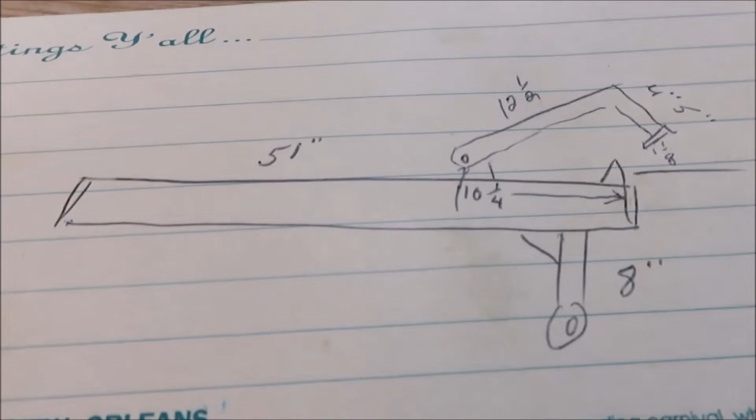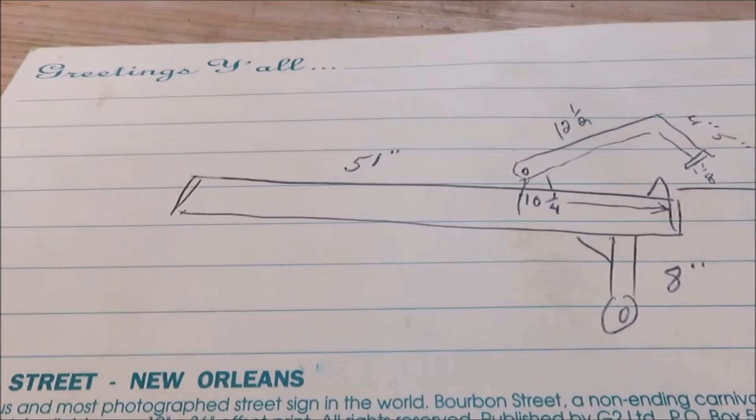Okay, this is just kind of a rough drawing. I did this right on the back of the truck so I can get an idea of how this thing's supposed to look and some of the measurements on it. Now, getting it to work, we'll see, we'll try it out and see how it works. But that's what we're going to build. And like I said, I got as many measurements as I could, so we'll see how it goes along here.

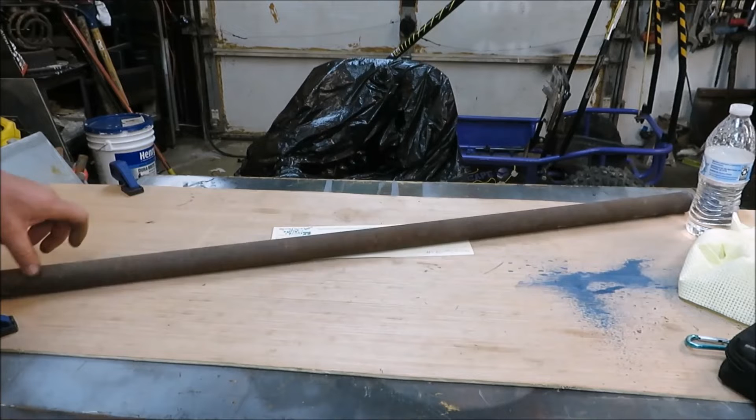Now, the first thing I'm going to start out with is just a piece of pipe. Let me see if I can get a measurement on that. Now, that is not the same type of material his was made out of. His was made out of some cheap metal, and his was actually bent in the middle. So I'm going to build mine out of a very heavy steel. It looks to be about 1.5 inches around, so this is going to be a pretty good piece of stock to pull on, and hopefully it won't bend.

So let's get this thing cut down. We're going to cut it 51 inches. Okay, we got our pipe cut.

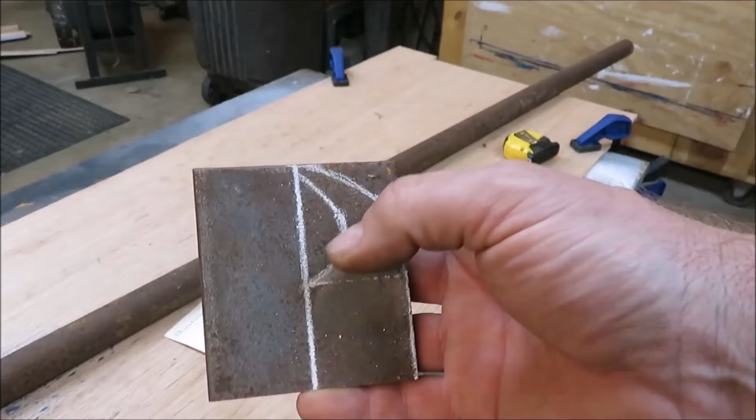Now we're going to be working on the little hook that's going to go on the end there to latch into the log. That's going to be our next step. Here's what I'm going to cut out — this hook that'll latch into the log. This piece here will actually sit inside the pipe and be welded into it. I'm going to get this cut out using a 4-inch grinder, cut it out the best we can, then grind it up and hopefully it'll work.

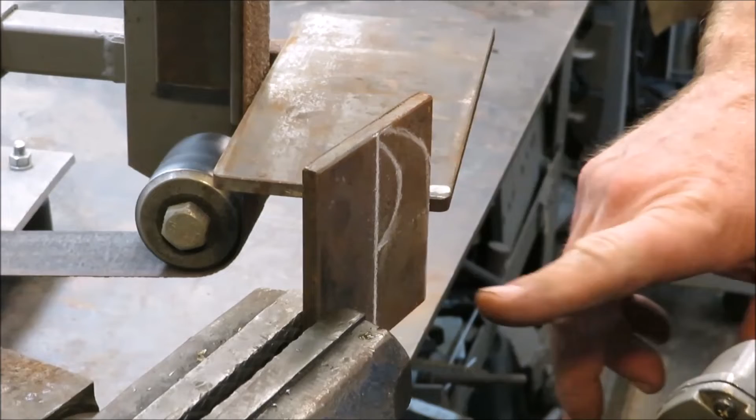On cutting this up, the first step is to cut this metal in half, because we're going to need two of these hooks. This is 1/4 inch thick steel, about 1.5 inches wide each. They're going to be a little bit less than 1.5 inches, but once we get it all ground down I'll get the measurement to make sure — I think it might end up around 3 inches by 1.5 inches, pretty much a 3x3 block of 1/4 inch steel. So I'm just going to go ahead and cut this guy in half.

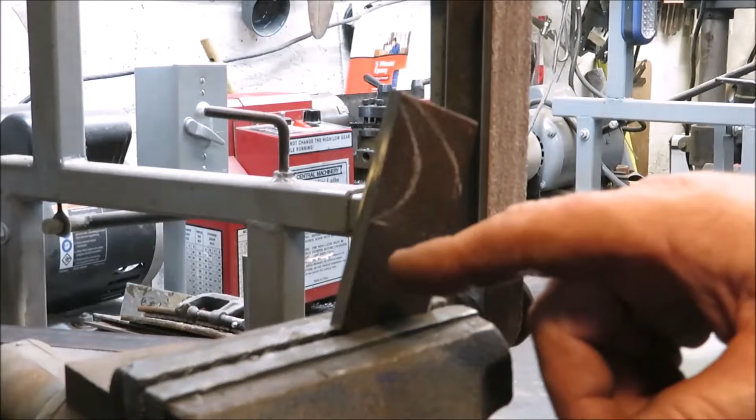Now that we got it cut in half, I'm going to take the 4-inch grinder and start working my way around this piece, trying to make a hook out of it, because it has to be able to hook into a piece of wood like a log.

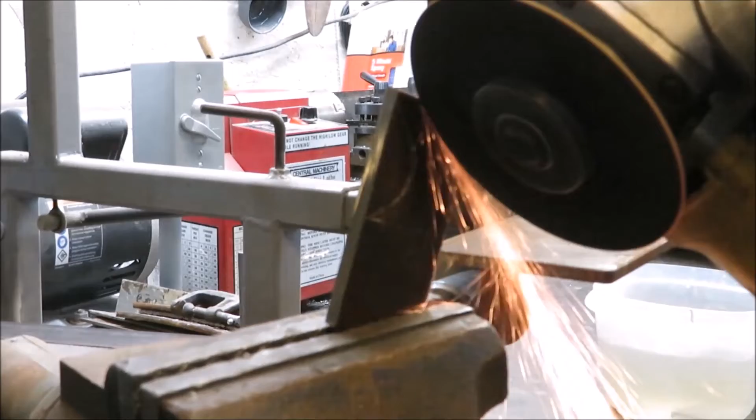Now that it's all roughed out, we're just going to take a regular grinder. We cut what we could, and now we're going to grind it out and make it look like a spike — a nice hook.

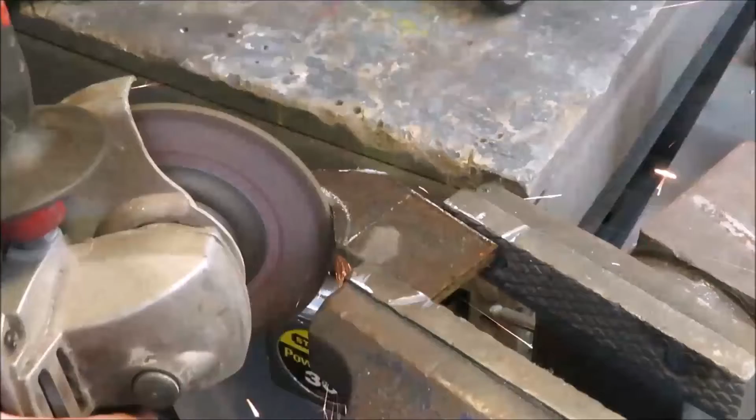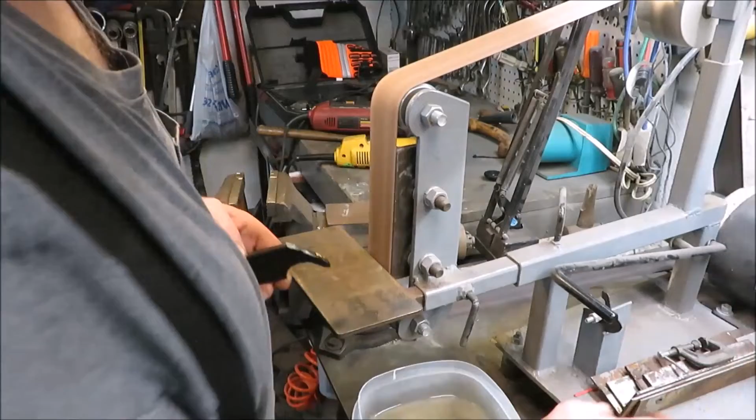Alright, I'm going to take that thing and put it on the sander, see if we can sand it down a little bit and get it nice and cleaned up.

Alright, now we got the hook. This is going to be the bottom hook that mounts in the pipe. I'm not sure whether I got the right hook on it or not. I think his just had a straight point, mine has a little bit more of a hook. Hopefully it'll dig a little deeper into the wood and hold it up on there better. Just hopefully it's not too sharp and it sticks in there. That might be a problem too. So we'll see.

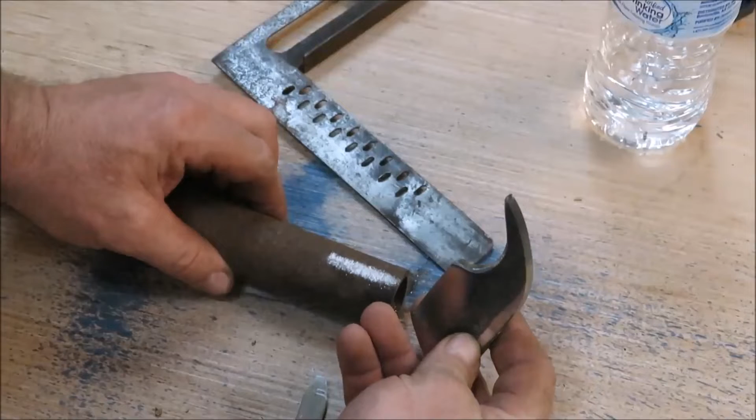Okay, my next step is going to be putting this all the way through this piece of pipe, from one side to the other. So I'm going to cut a slot out of here, put this through there, and weld it inside there. So both sides will be supporting this one hook. All right, let's get this guy cut out now.

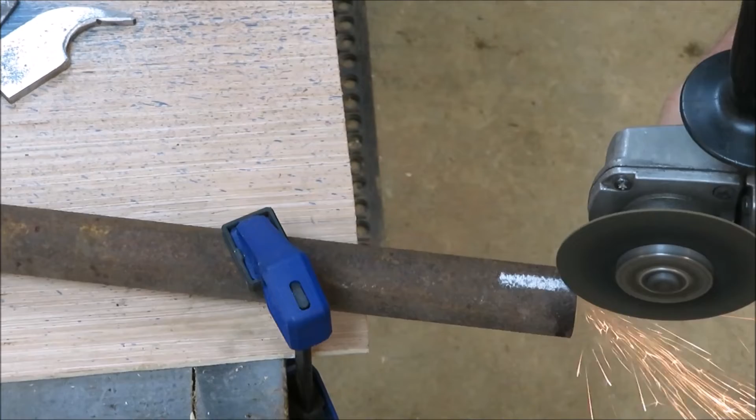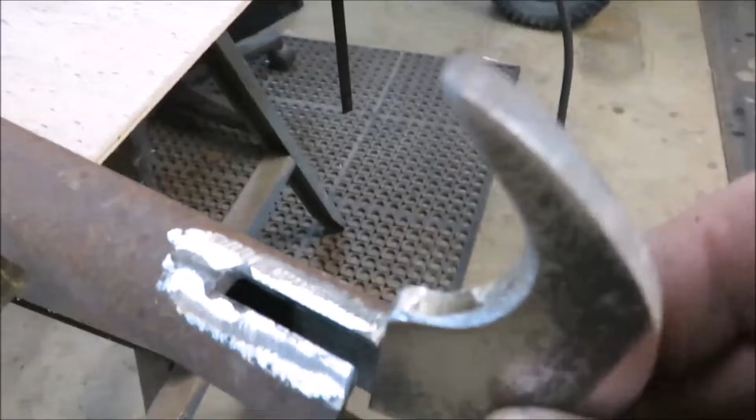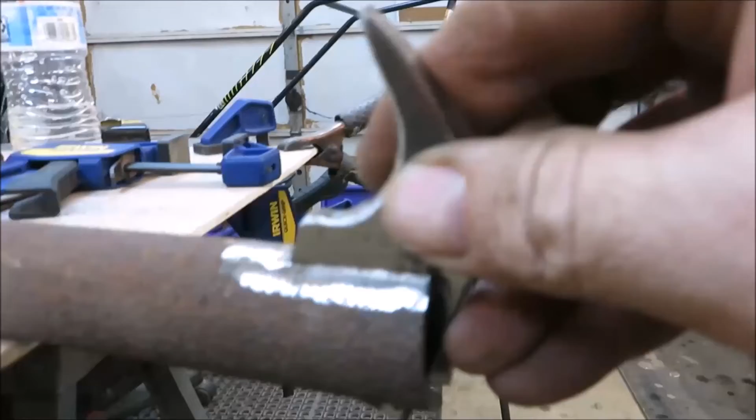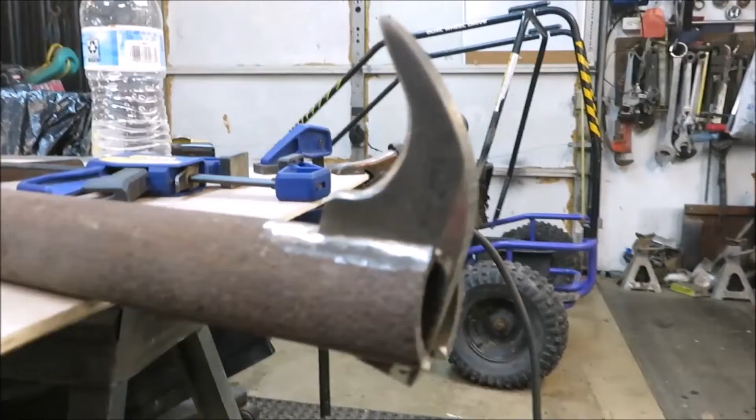Okay, I got that all cut out, both sides, and this thing fits in there really nice. I could actually probably tap it in and get it in there a little tighter. But I think maybe I want this thing bent a little bit more. I think I could have made my hook a little bit straighter. I think that looks better there. So I may just weld it in there like that. It's tilted, but it looks really like a good hook. So I think that might work okay.

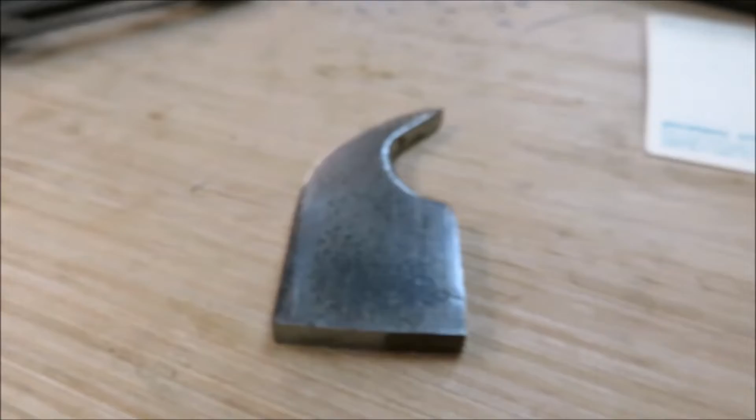So let's take this little piece out, take it over here to the table and show you guys. We're using 1.5 inch pipe, and this guy is about 1.5 inches, so it's just as wide as our pipe. The whole thing overall is about 3.25 inches, and 1.5 inches of that's going to be in the pipe. So you got about 1.75 inches outside the pipe. Should make for a pretty good hook.

Now I just free-handed this on here. I think I could have left some more of this in here. I don't think I had to take all that much out, because this may end up sticking in the wood too tight, I'm not sure. But you should be able to wiggle it out, hopefully it don't bend or anything. We'll get some big old logs and put it in and try it and see how it works.

And you know, I really don't have a blueprint. All I got is some numbers I've written down off of another one, but I'm trying to actually build my own instead of one like theirs. Theirs just had a point on it, cut in just a V, like an arrow type thing, but no hook on it. So I'm hoping that this one's going to work out. So we're going to go ahead and get this one put into the end of the pipe over here.

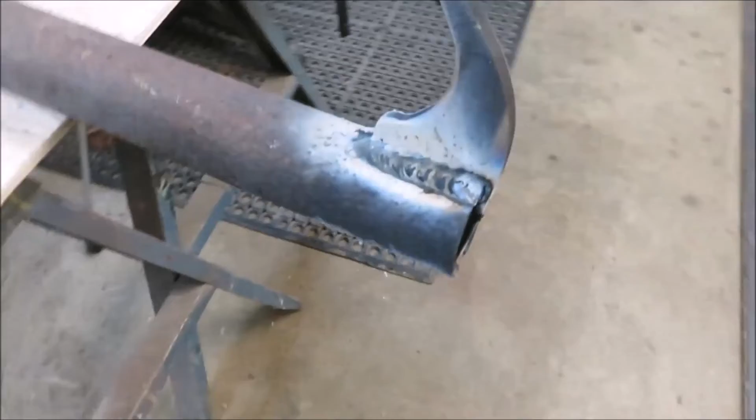Okay, I got it all welded. It's not the greatest, but I think it's going to hold up good. We're going to take the grinder to it, clean it up real good, and I think it'll be fine. I think it's going to look pretty good on there. So we'll go ahead and get it ground up and cleaned up and start on the next part.

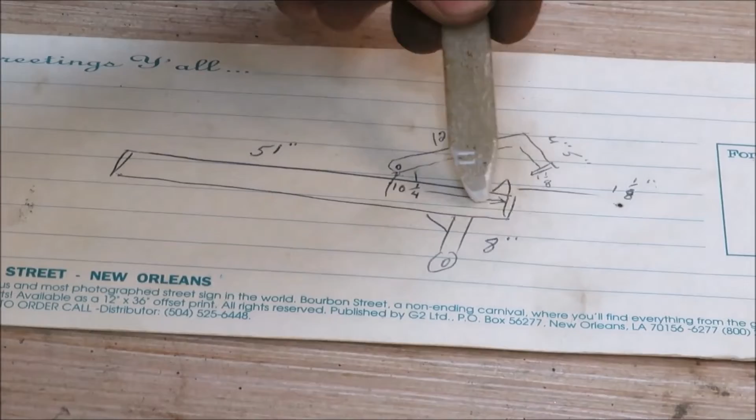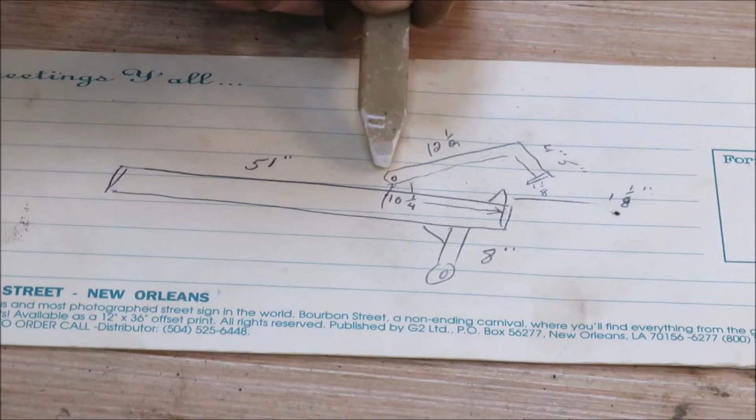All right, so far we got a 51 inch bar, 51 inches. We got it cut, we have our little hook built. Now we got to build a bracket right here, and then this big hook here that goes around the log.

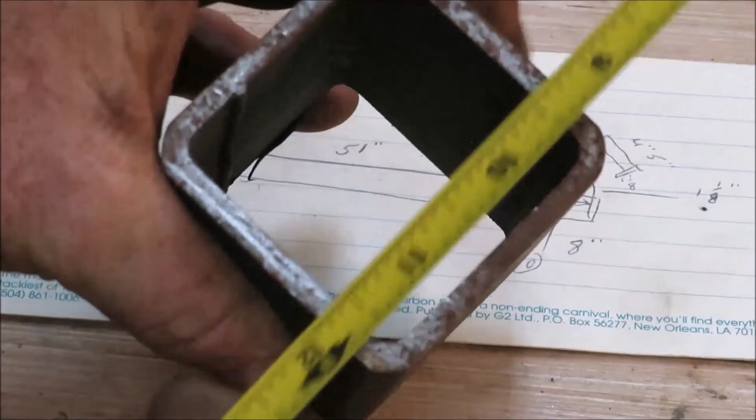So for this bracket that I need to weld to the beam, to the bar, I got an old piece of square stock. I don't have any thickness metal like that, and that's a pretty thick metal. I'm kind of looking for that size, and it's about, I'm going to say 3/16 thick. That's a good heavy steel.

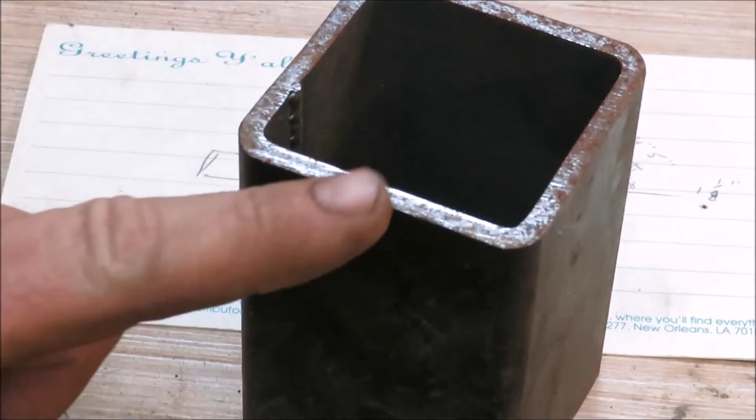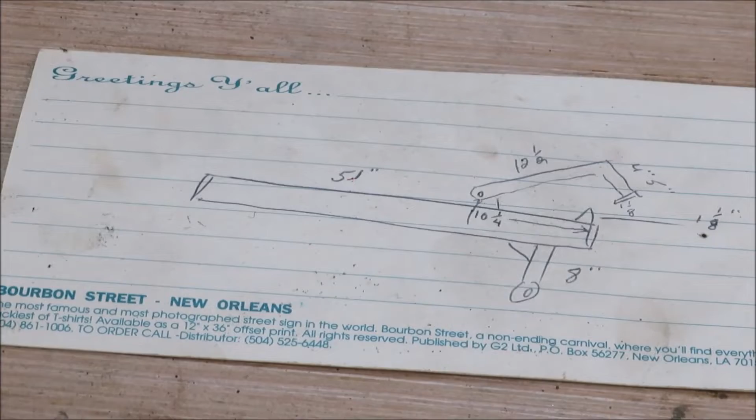So I think what I'm going to do is cut a couple pieces out of the side of this and make these little brackets right here that's going to hold my other arm that will help pick up the log. So let's go ahead and cut some pieces off of this piece here and see what we can do with it, see what kind of design we can come up with. Okay, we're just going to go ahead and cut one side out. I'm almost thinking that one side might work, so we'll go ahead and get it cut out.

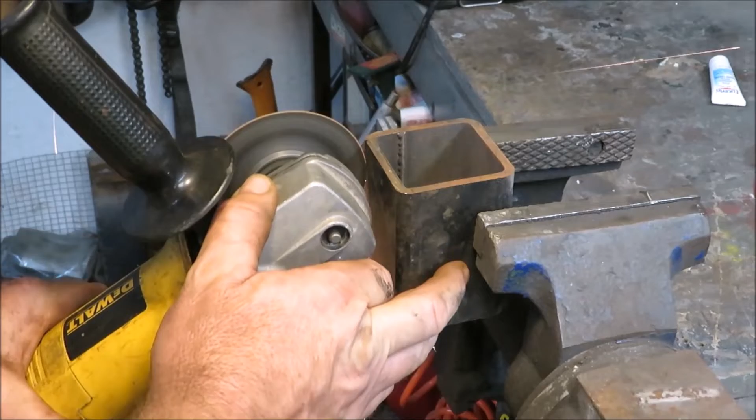Now I'm just going to take the piece that I had cut out of here. I got it in the vise. We're going to cut it in half, so we have two nice little pieces of steel, 3/16 thick.

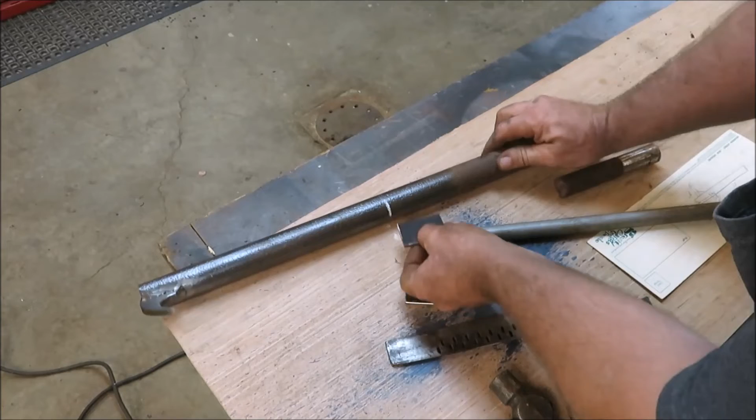All right, now I got 2 plates of steel here. One will go on this side and one will go on the other side. They'll kind of clamp together like this.

If they're not the perfect size, we'll cut them down as we need them. But what we'll do is drill a hole through this. And I'm trying to figure out what I'm going to build the hook out of, this guy right here, the hook.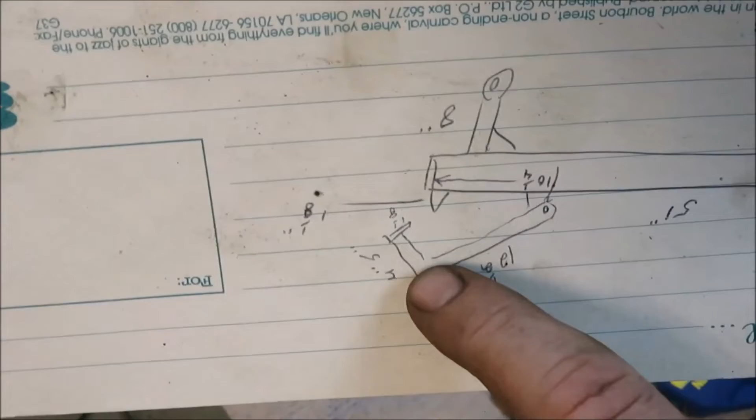I'm not sure what I'm thinking about. I have this piece of 3/4 inch dowel. I was thinking about throwing it in a forge and flattening one end so it could go in between these 2 brackets, and then put the hook on the other end, and then forge the hook out so it would hook into the wood. I haven't figured it out yet, but when I do, I'll get you guys back in here and let you know what I'm going to do.

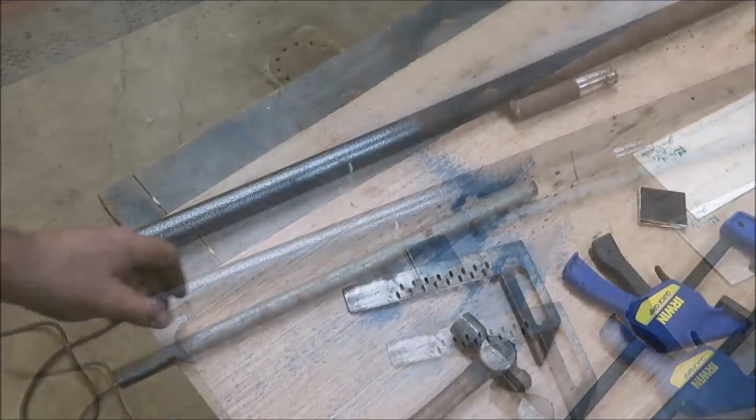Well, I've decided I'm going to forge this out. I think I can forge it out to about 1/4 inch thick, and it probably wouldn't take as long as going around trying to find a piece of square stock. I wanted a piece kind of rectangle, maybe 3/4 inch by 1/4 inch thick.

But I can't find any, I don't have any here, but I got this 3/4 inch stock. I'm just going to try to flatten about 2 to 3 inches of this and get it down to about 1/4 inch thick, and then we'll put our 2 plates on it and get them drilled out. So we're going to go ahead and get this forged out flat.

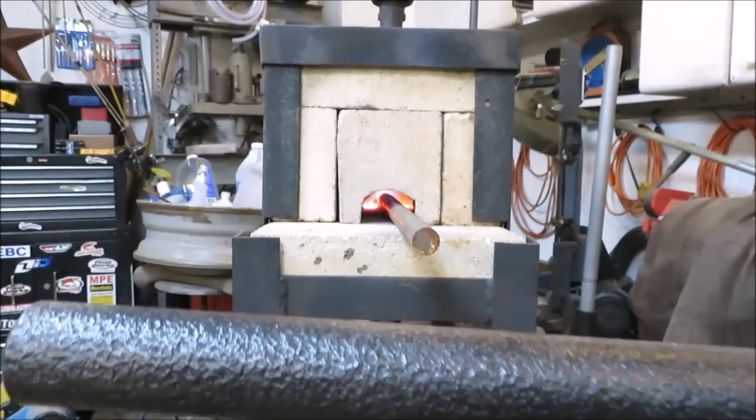Alright, I got it in the forge, got it heating up. We'll be able to flatten that end out and hopefully bend this thing and everything right in the forge to put on the end.

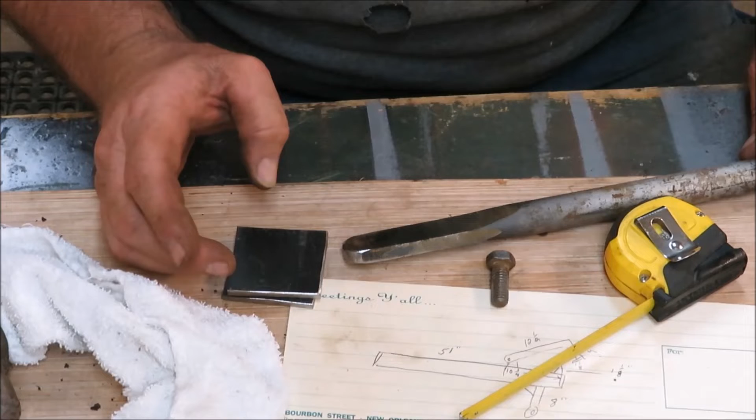Okay, pretty cool, we got to use the forge a little bit. I enjoy working with the forge, but it's been so hot, and it's actually pretty cool today. So we got to do a project with the forge. And not only that, we're going to bend this thing in there and sharpen the other end, so this is going to be one solid piece that'll hook to the log.

And this is how it's going to go together. We got these 2 pieces right here. We're going to clamp these together, and I'm going to use a 3/8 bolt, put a 3/8 bolt through there and snug them up a little bit.

I'm going to try to get a little spacer in between here, because I don't want this really tight, and I don't want it really loose, but I want a little bit of play in there because we don't want this thing seizing up on us. Just a little bit of play is not going to hurt it, I don't think. We'll see as it goes along, but we're going to go ahead and get the 3/8 hole drilled in these plates.

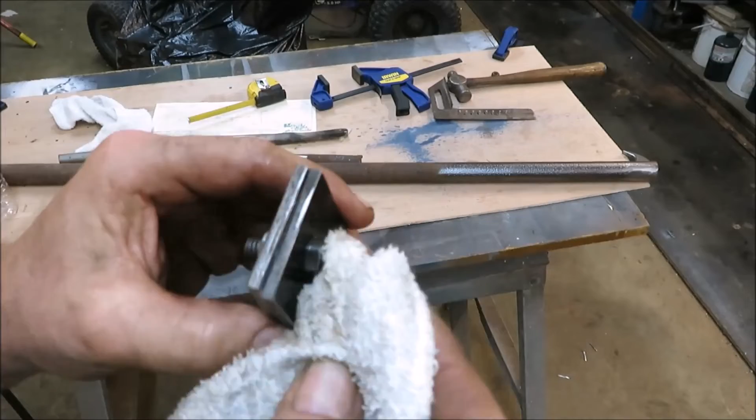Alright, now here's the two pieces we drilled, and I put a 3/8 bolt through there. I took that to the sander, so I got one side that's flush. This will be the side we weld to our pipe, our pry bar.

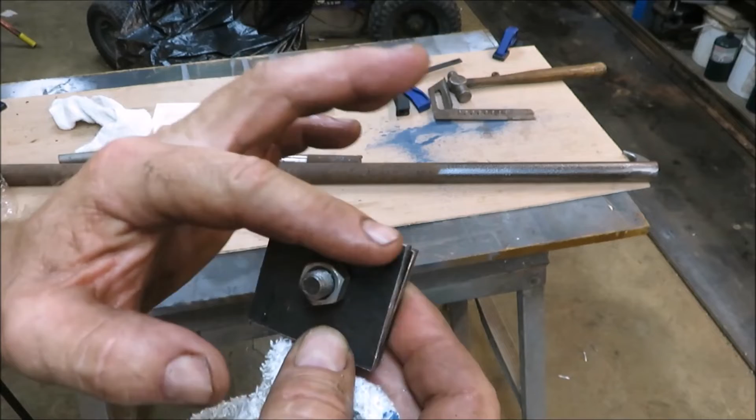Now we can take this over to the vise and put it in the vise and round this edge off a little bit, and round that off and square that up real easy with a grinder. So that's what I'm going to do right now, get this thing squared up and rounded up, make them both look identically the same.

Okay, we got it all grinded down, took it to the sander. It looks pretty nice. So now we'll just take our bolt off. We should have no problem knowing which direction this thing goes because they're both the same.

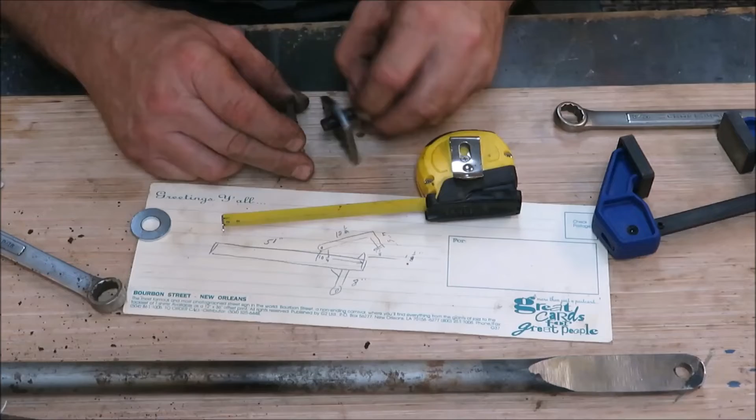Let's get rid of this guy. Now we should be able to put this guy in here. Hopefully this is going to work out.

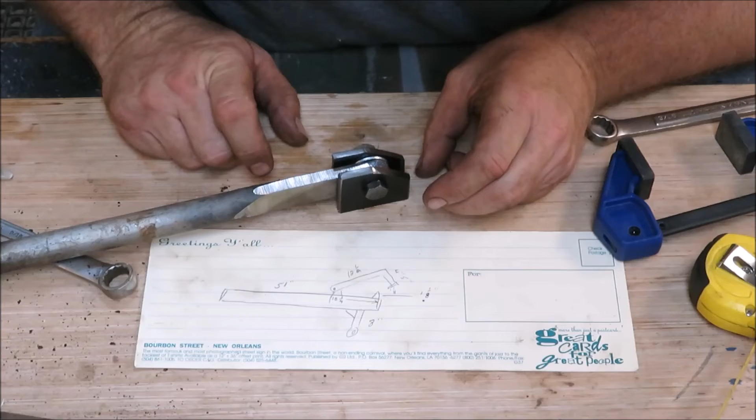Now, I thought about putting a washer in here, maybe, and then putting this one on, and then just tightening this up a little bit. That might be a little too loose, I'm not crazy about it being too loose. Let's see what it looks like if I just don't tighten it too tight, just put it on.

Might be okay if I just don't tighten it real tight, just kind of finger tight. And then we're going to get this now. See, this will be able to swing up and down pretty easily. That's what our goal is. So we're going to get this attached to our pry bar.

So let's get on our pry bar now, looking this thing over. Let's clean up a spot where we want this on the pry bar. We want the bolt about 10 inches up from the tip. So I got it marked 10 inches up on the pry bar, and we're going to go ahead and see if we can clean off a spot to put this guy.

Alright, what I've done here is I kind of lined this up like a gun, looking down the barrel of a gun. I'm trying to get that thing lined up back here so this little tooth would look like it's going through this piece back here. So I'm just kind of lining it up. It's not perfect there, but I think it really looks nice.

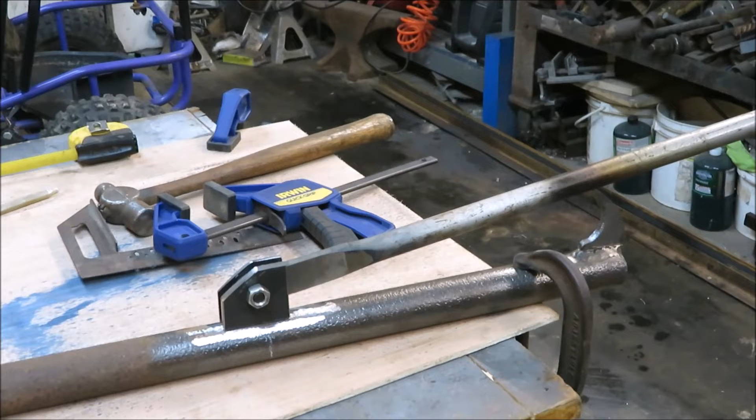Okay, we got it all welded on there. It seems to be working pretty straight. When I put it up this way and put it down here, it's a little bit off of the pipe up there, but it's dead center here. So this is our main part anyhow. So as long as this is straight on, I think we're okay.

So what I'm going to do is probably call it quits for the day, and then tomorrow we'll come out here and measure up so far, and then we'll know where our bend is going to be, and then we'll sharpen this end. We'll put it in the forge and get it sharpened and make a hook out of it. So we can then bend this and match the hook up with that hook, and that way when you put it on a log, it'll clamp on your log there. I guess it might work out pretty cool.

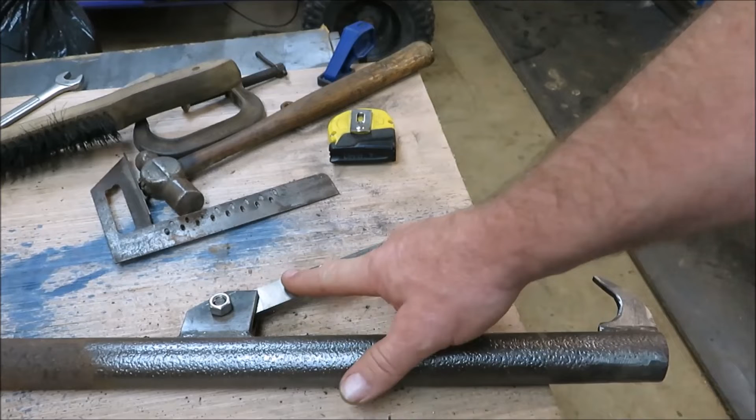Okay, so we have this on here now. We got this done last night. Today we're going to heat this up. Now this is 8 inches from that bolt to there, about 8 inches. Last time we thought it was 12, but it's not. We're going to do about 8 to 8.5 inches.

Somewhere in here, we want to get this thing melted or heated up, and then we're going to bend it down to meet this guy here. So that's what we're going to work on next. We're going to heat this up in the forge, and then we're going to get that guy bent around there.

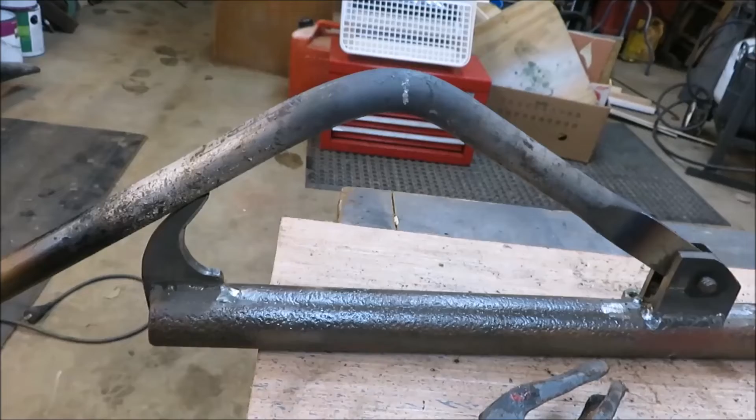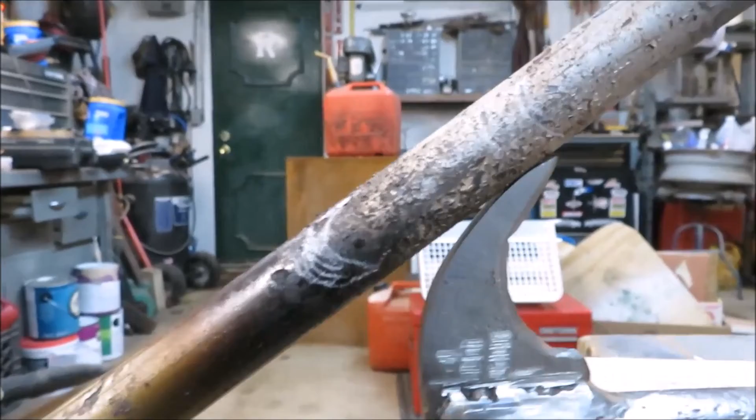We got our bend on there. I don't know exactly what the bend's supposed to be. So now what I want to do is get our tip to end up right by this one here. I think if I take it down in here and cut it off and then bend that around, hopefully we can get this tip to match that tip there. So we're going to cut it off probably right in there, and then we'll try to forge our tip, our hook.

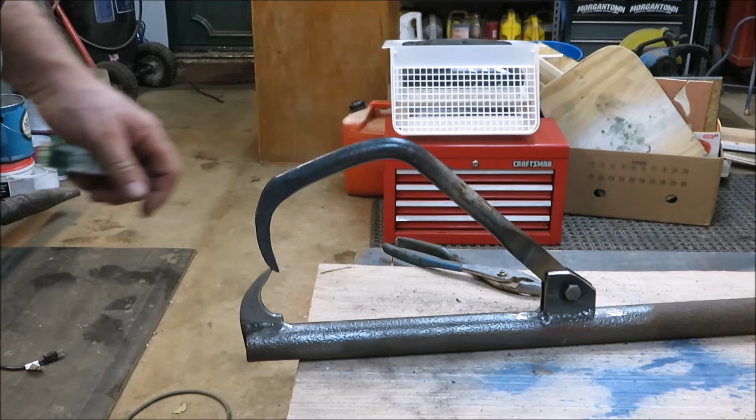Alright, you can see here I'm a little bit off on this, but I'm going to take this over to the grinder and straighten the rest of it up with the grinder. I don't need this to be that long, so I'll probably shorten it down a little bit and give it a nice sharp point that'll go into the log, so we'll be able to clamp on the log. Now it has a little bit of play in it, but I think it's good. It still lines up decent. We're probably going to weld a little plate in here to keep it from going closed any further.

And then I'll weld a plate in the back of this, maybe just a piece of dowel, so when this comes up, we don't want it to go too far up, because when you roll your log over on it, this is what's going to hold the log from rolling down the handle. So we got a few more things. We're going to straighten this out, get it to line up, get the point on it that we want, and clean that piece up like we did the bottom.

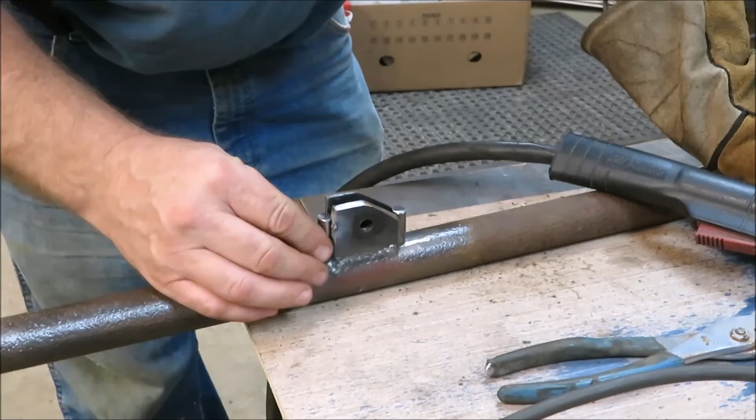Alright, we got a couple small pieces of dowel here, 3/8 dowel. We're going to weld a piece on this side and a piece on the back side, just so we have a stop for our wedge or our hook. We don't want the hook to go too far one way or the other. So we're going to go ahead and weld these guys in there.

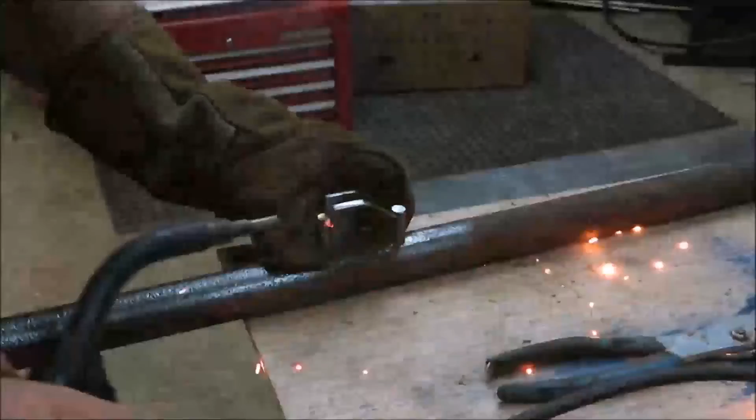Now we got to start on the bottom piece. I have another piece that's got to go on here - the little T that you're going to pick the log up off the ground with. And I'll show you how that's going to be done.

Alright, now what I'm doing here is I got this little block of steel, and I'm going to be welding it onto here. Then we're going to slide this piece up on there, and it's actually going to have the T on it that will hit the ground. So when you lift it up, this doesn't sink down in the ground - it gives it a little foot to rest on.

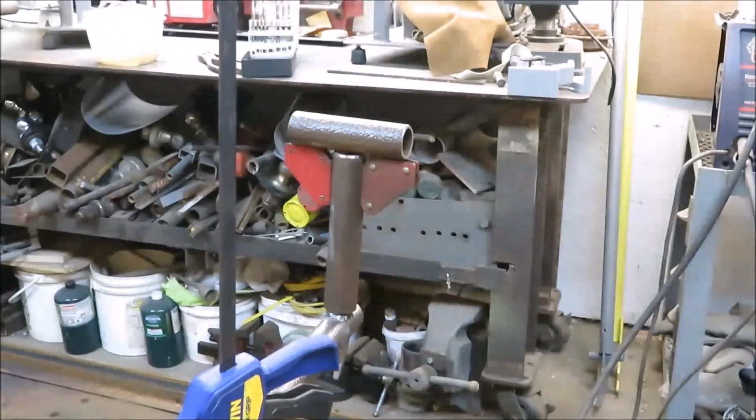Alright, what I've done here is I cut 2 pieces of the same pipe that's up here. We got that 1-inch piece welded down there, and we're going to make a T for the bottom of here so we can roll our log up. So we're going to go ahead and get this welded on.

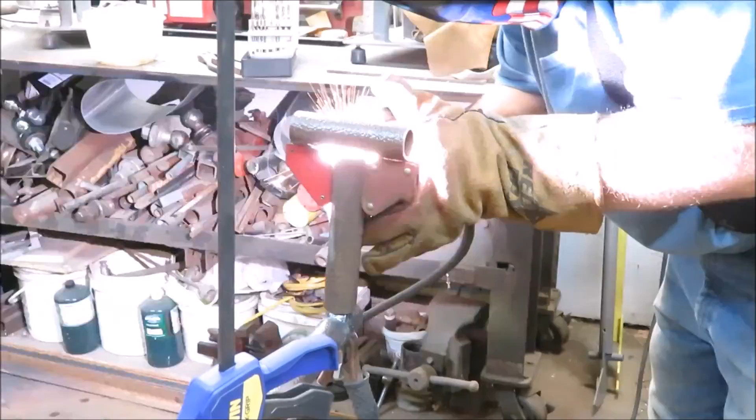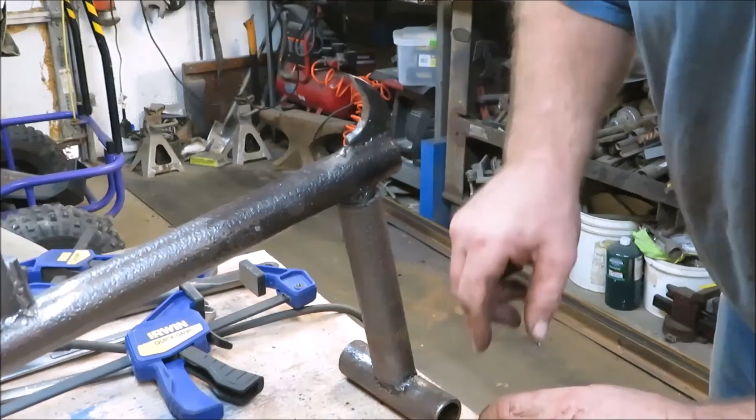All right, now you can see we have the T, and we're gonna drill a hole through here and put a bolt in here. That way we could always take this off and just use this part, or put it on and use both parts.

Now eventually I'm gonna throw a pin in it, but for now I was gonna get a clip - a pin that would just slide down through there and clip it. That way you wouldn't need a wrench to take it off. But right now I'm going to put a bolt on it, because guess what - I ain't got a pin. So we're going to get a hole drilled in that and get it set down on there.

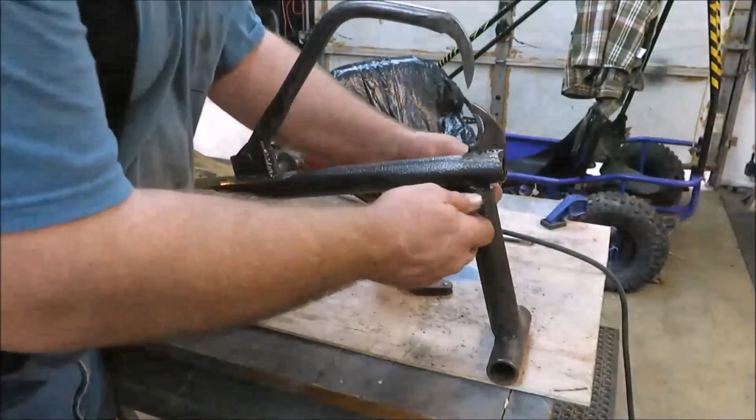Okay, now here's the piece that we just mounted on. We welded this on and drilled a hole through it. We can take it off and just use that piece to roll logs, or we can put this piece on and put our bolt through here, which I'll have a pin that'll clip around this, and that'll work pretty nice. This guy is pretty much finished - all we got to do now is get it painted up. Everything works the way it should. Hopefully it'll work on a log the way it should. So what I'm going to do now is clean my table off and get this guy painted up. Make it look pretty.

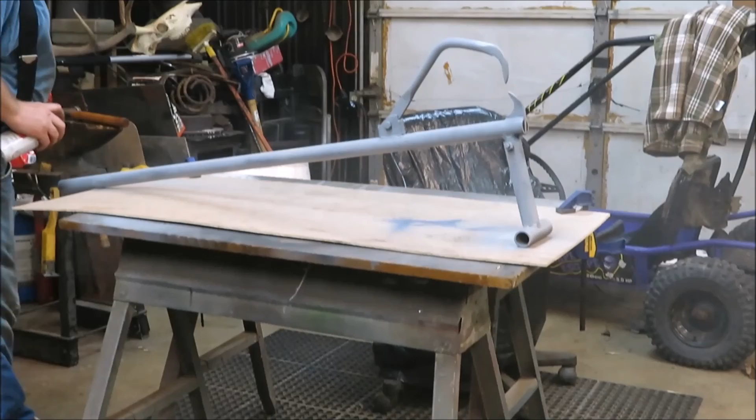In the next video, we'll take it out and give it a test, see how it works. If we have to do any type of modifications to it, we'll do it in our next video.